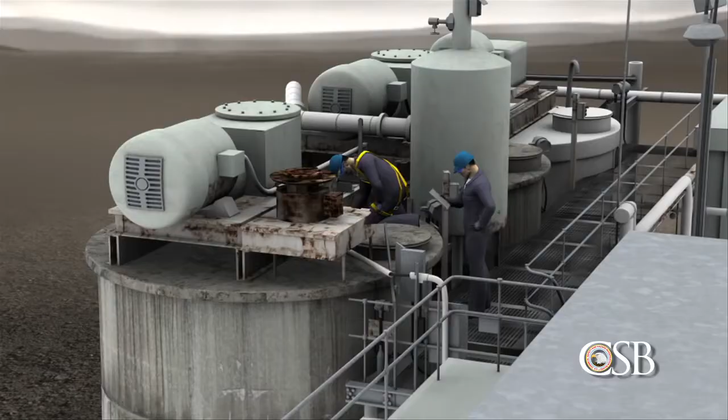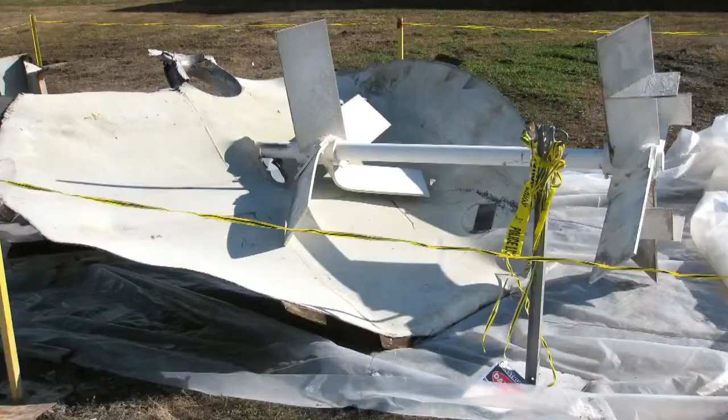On November 9, 2010, a powerful explosion shook the DuPont chemical manufacturing plant in Tonawanda, New York, a suburb of Buffalo. A contract welder was performing maintenance work on a tank that, unknown to him, contained flammable gas. The explosion blew the top off the tank, throwing the welder to the ground and killing him instantly. A second contract worker was burned.

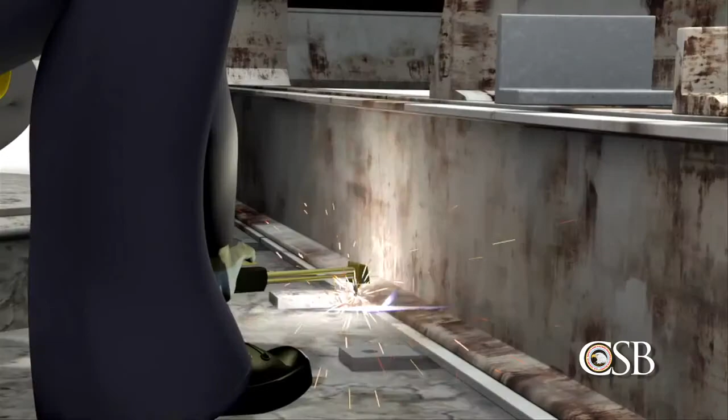The tragic explosion at the DuPont facility exposed weaknesses in how process hazards were analyzed and controlled. The result was the death of a welder in a preventable hot work accident. Hot work accidents occur when workers are welding, cutting, or grinding near flammable vapor, and were the focus of a 2010 CSB Safety Bulletin. Deficiencies in the safety management of hot work were among the causes of the tragedy at DuPont.

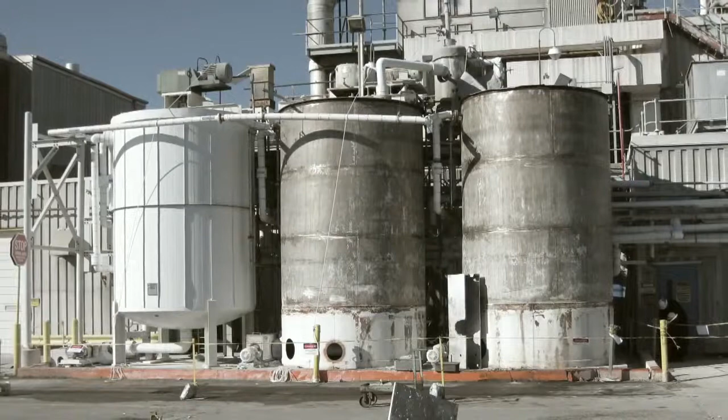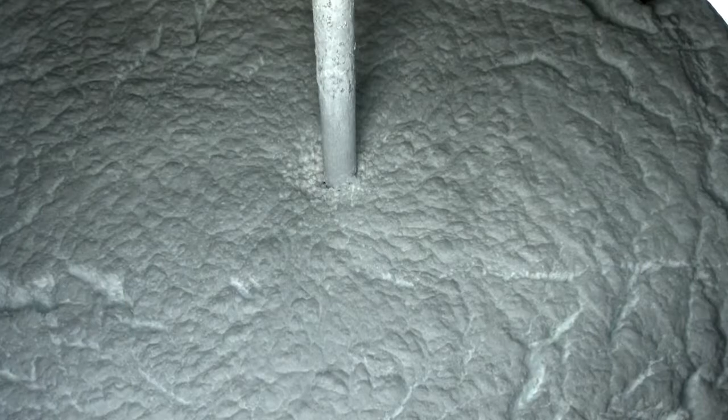DuPont's Tonawanda facility manufactures a polymer known as Tedlar, used in solar panels, and Corian for use in countertops. The process of producing Tedlar began with a chemical reaction to convert flammable vinyl fluoride gas into a slurry of polyvinyl fluoride polymer, or PVF, in water. The PVF slurry then passed through separators.

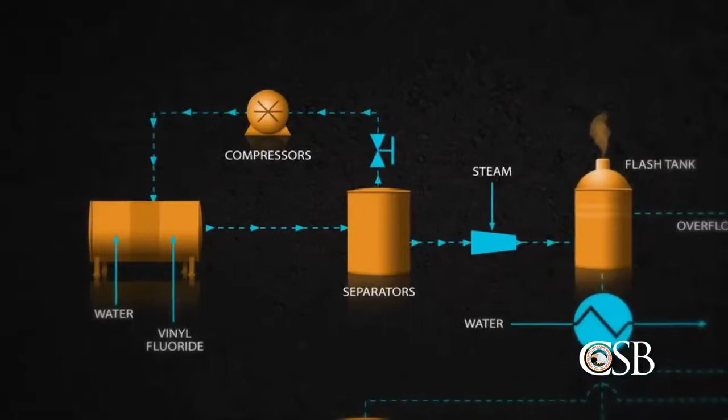Compressors recycled unreacted vinyl fluoride gas into the process, while a small flash tank released residual vinyl fluoride into the atmosphere. Finally, the slurry was transferred to one of 3 insulated holding tanks, usually tank number 3. Tanks 1 and 2 were reserved for slurry overflow. Tank 1 normally remained empty.

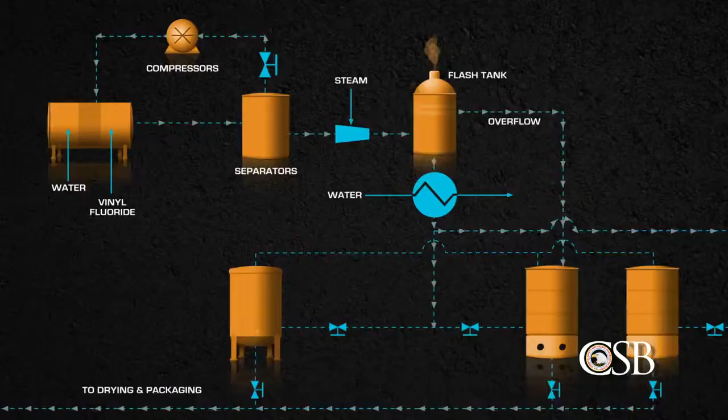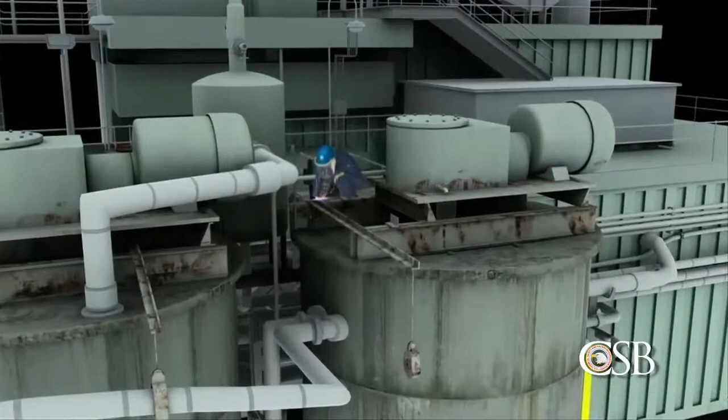On October 22, 2010, the Tedlar process underwent a planned shutdown, during which workers removed the asbestos insulation on tanks 1 and 2. Removing the insulation revealed that the agitator supports for the tanks were heavily corroded. DuPont directed contractors to repair the supports, which would involve welding and grinding on tanks 1 and 2.

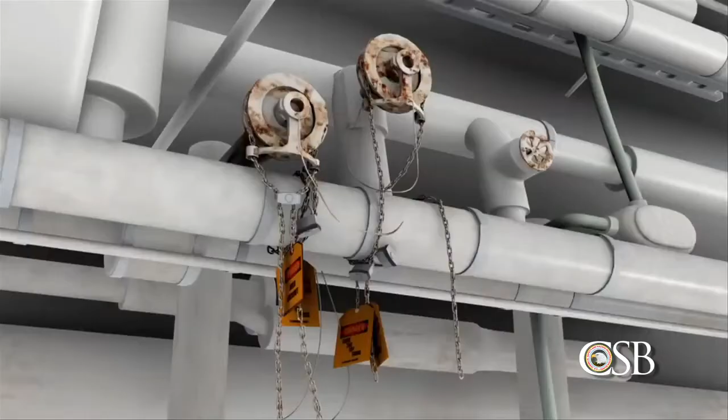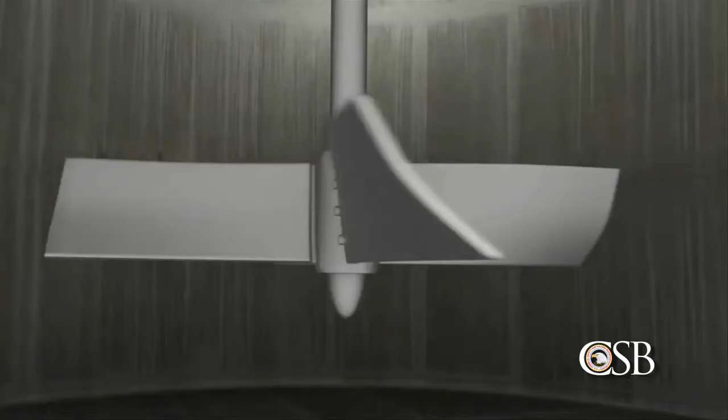The hot work on tank 2 occurred during the shutdown without incident, but the repairs on tank 1 were delayed while parts were ordered. DuPont personnel determined that it would be safe to perform hot work on tank 1 after the restart. On November 6th, DuPont operators locked all 5 valves leading to and from tank 1 in the closed position in order to stop potential slurry flow. The tank's agitator motor was also locked out.

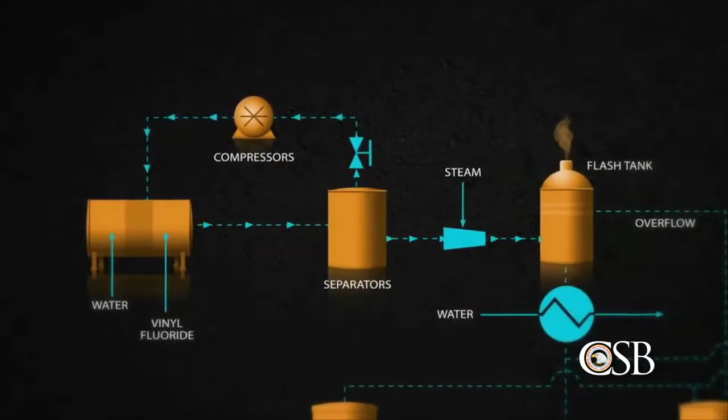However, DuPont personnel did not block the flow of gas inside the overhead piping, or overflow line, that connected the vapor space of all 3 tanks. They mistakenly believed that flammable vinyl fluoride gas could not reach any of the slurry tanks. But the CSB investigation found that even in normal operations, vinyl fluoride was not completely removed from the slurry and was always present in the slurry tanks in varying amounts. When the process restarted on November 7th, the flammable gas was able to travel from tanks 2 and 3 through the open overflow line into tank 1.

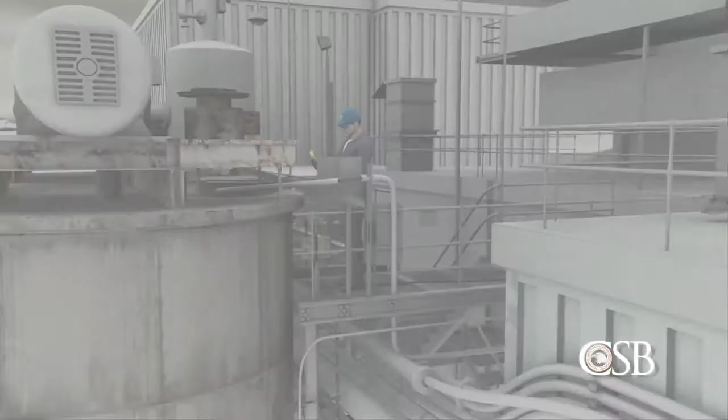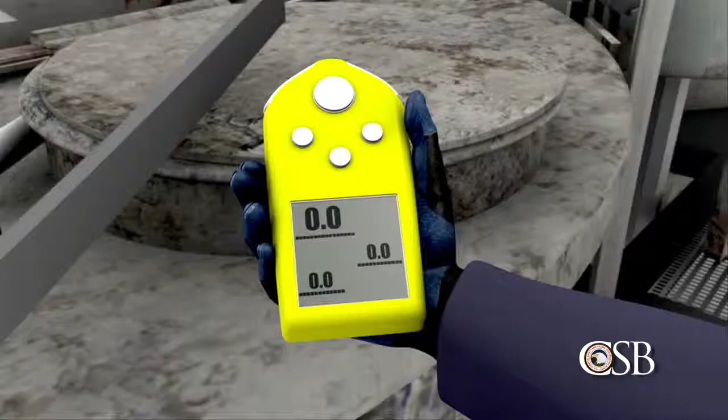On the morning of November 9th, a DuPont technician tested the atmosphere above tank 1, where welding would later take place. There were also 2 continuous air monitors in the vicinity. No flammable gas was detected, and the hot work was cleared to begin. But no testing was done to measure or monitor the atmosphere inside the tanks, where, unknown to the contractors, the flammable gas was at dangerous levels.

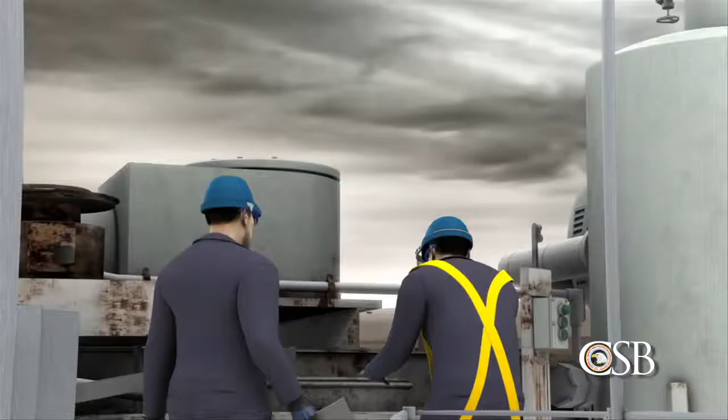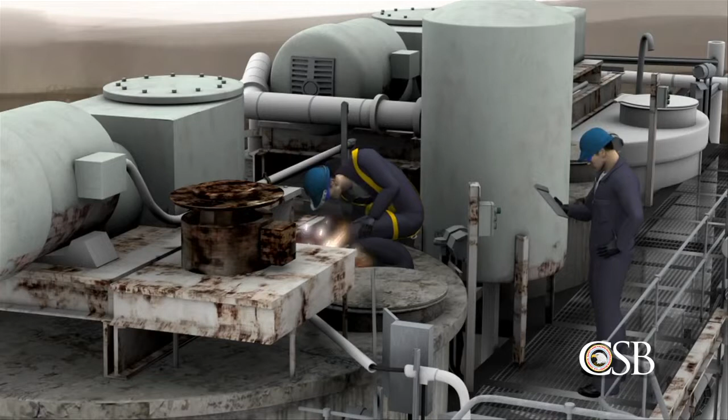Around 9 a.m., 2 contract workers began welding and grinding on tank 1. The welder connected his safety harness to the tank's agitator support and worked on top of the tank as the foreman looked on from the nearby catwalk. At approximately 11 a.m., the welder was repairing corroded portions of the agitator support beams directly above the flammable gas. A hole around the agitator shaft may have provided a pathway for ignition. Welding sparks could fall into the tank, even as flammable gas might drift upward toward the sparks. The ignition of the vinyl fluoride caused a powerful explosion.

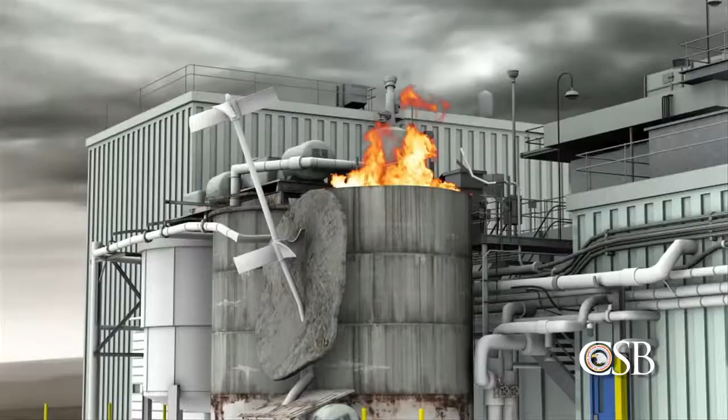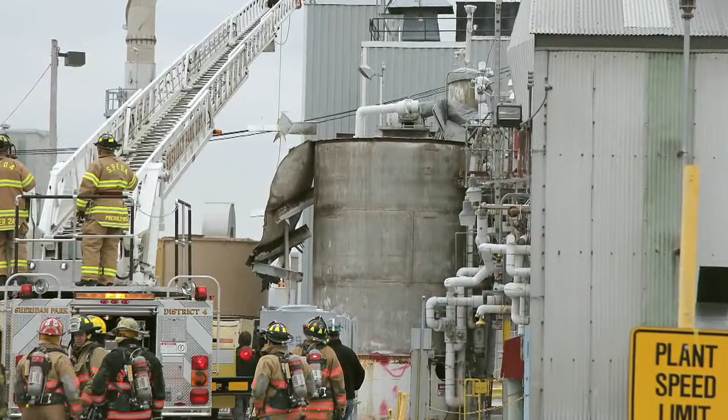The force of the blast blew the top of the tank almost completely off. A flash fire erupted that consumed the flammable gas and quickly burned out. The welder was thrown to the ground, killed instantly from blunt force trauma. The foreman's face and arms were burned.

Mark Wingard was a member of the CSB team that investigated the accident at DuPont. Had DuPont technicians tested Tank 1 for a flammable atmosphere, they would have known that any hot work presented a serious explosion hazard. But plant engineers did not realize that significant amounts of flammable gas could be present in the slurry tanks, and the testing was never done.

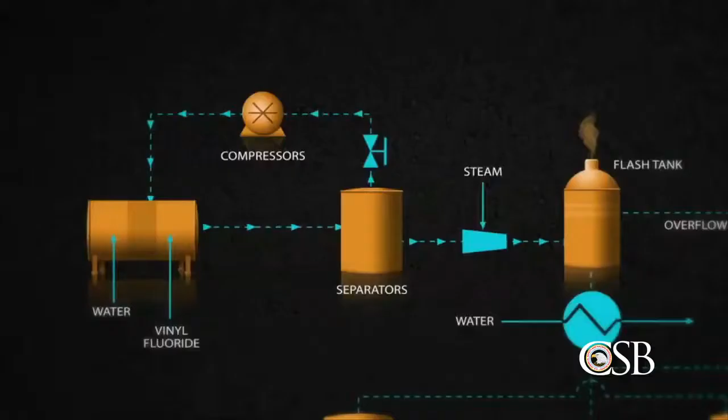DuPont regarded most of the Tedlar production process as covered under the OSHA standard for Process Safety Management, or PSM, and therefore subject to stricter operating and maintenance requirements. But DuPont personnel did not include the slurry tanks in the facility's PSM program. In a 2009 process hazard analysis, DuPont erroneously concluded that flammable vinyl fluoride gas could never reach the tanks in dangerous quantities.

We found that the contractors did obtain hot work permits for welding on Tank 1, but those permits were authorized by DuPont employees who were unfamiliar with the specific hazards of the process, and the permits did not require testing the atmosphere inside the tanks.

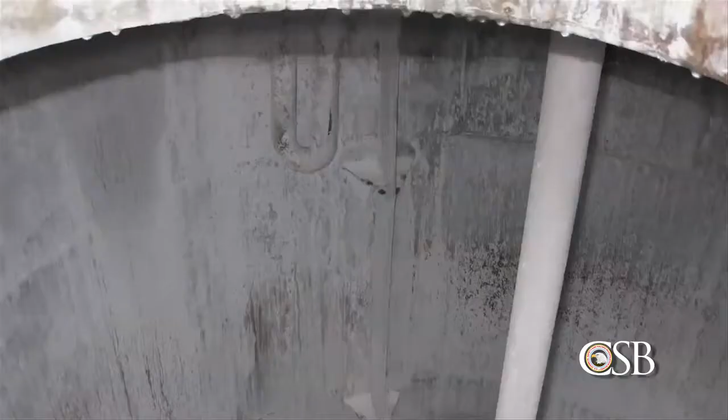Two additional factors may have contributed to the tragedy. Prior to the explosion, DuPont personnel had discovered that slurry tank number 2 had a hole in a liquid trap, which was designed to prevent the flow of gas from the flash tank. Without a liquid seal in the trap, there was an additional pathway for vinyl fluoride gas to flow into the tanks. However, this hazard went unrecognized, and DuPont engineers concluded that it would be safe to return the tank to service. No formal management of change review was conducted.

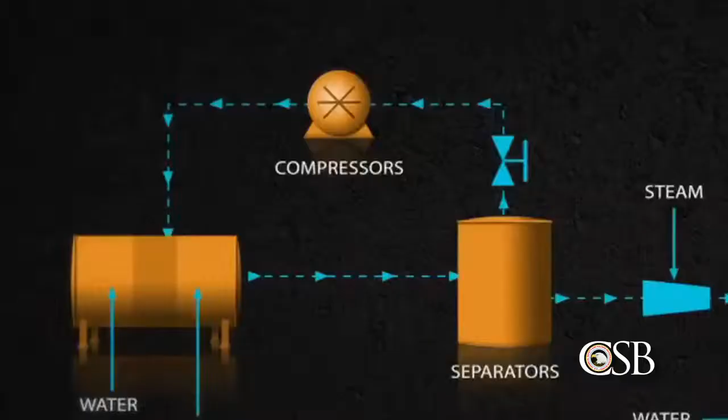Further adding to the danger, on November 8th, there was a malfunction in a compressor used to strip vinyl fluoride gas from the PVF slurry. As a result, the slurry contained more than the normal amount of vinyl fluoride. Once again, DuPont personnel did not formally analyze the safety impact of continuing to operate with a malfunctioning compressor.

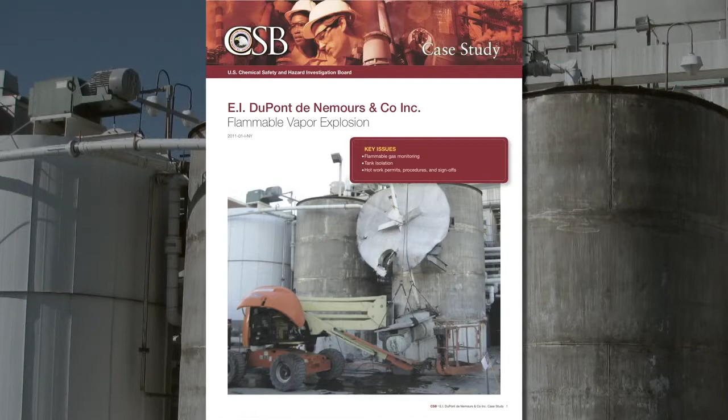In its final report, the CSB recommended that DuPont revise its corporate policies to require atmospheric monitoring inside tanks before and during any hot work. And the board recommended that DuPont require all process piping, including vent lines on tanks, to be positively isolated before authorizing any hot work.

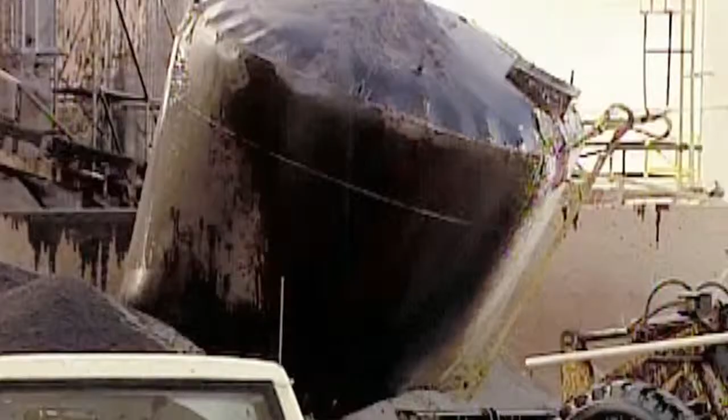In our 2010 Hot Work Bulletin, the CSB identified 11 accidents similar to the one at DuPont. All involved hot work on tanks that ignited flammable gas inside. In all cases, the CSB found that there was not an adequate system in place for monitoring the atmosphere for flammable vapor where hot work was to occur.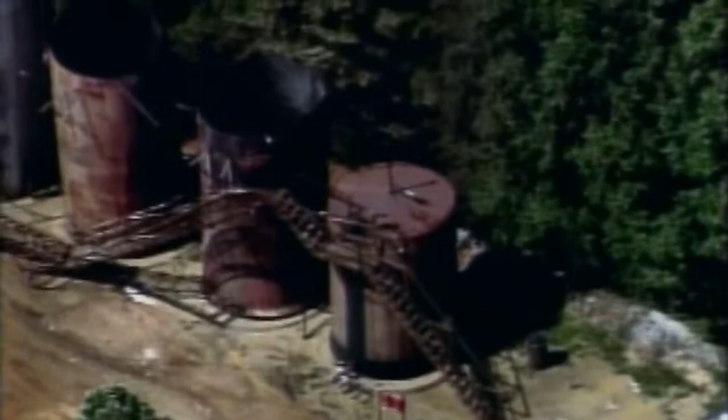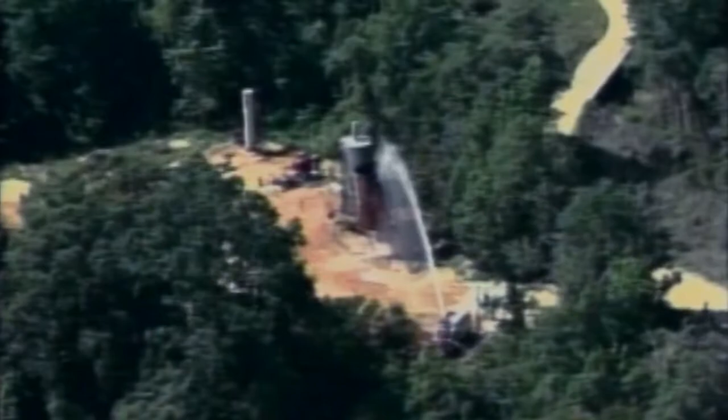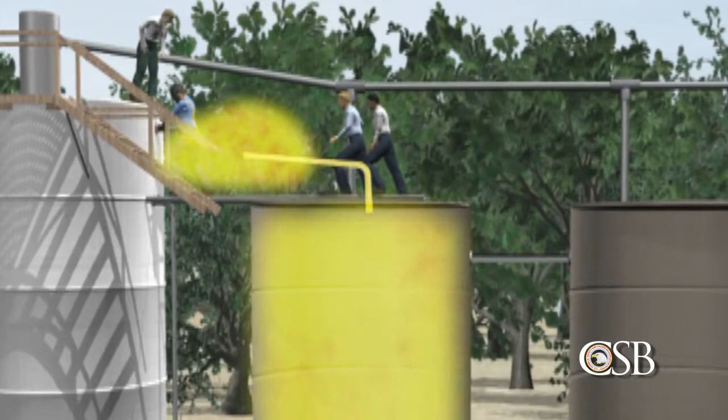For example, in June 2006, 3 contractors were killed and another seriously injured in an explosion at the Partridge-Raleigh oil field in Raleigh, Mississippi. The contractors were welding on one of 4 storage tanks when welding sparks ignited flammable vapor flowing from an adjacent tank. As was the case at DuPont, no monitoring was performed to test for flammable gas inside the tank, and piping to the adjacent tank was not isolated.

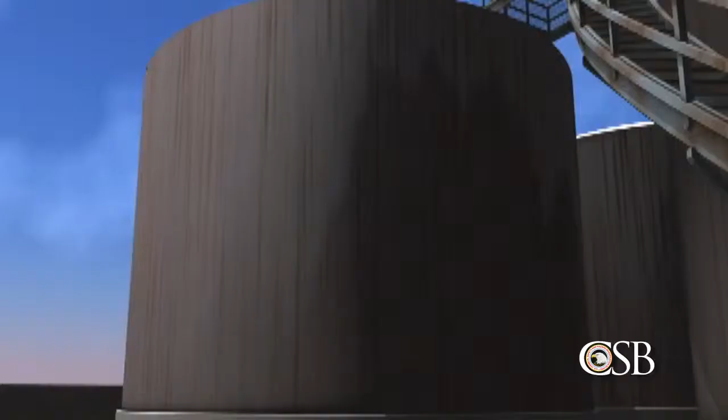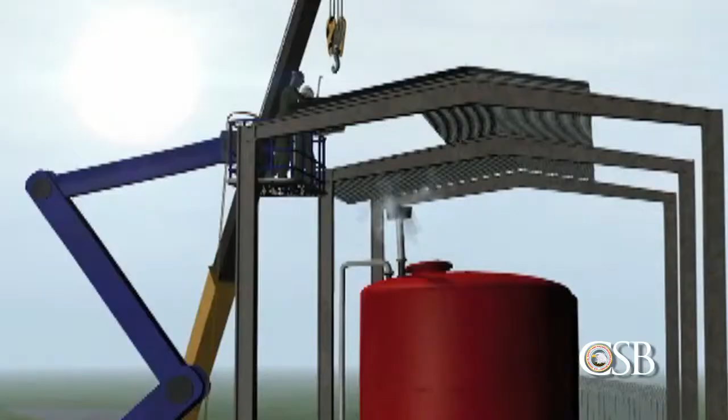In July 2001, an explosion killed 1 contract worker and injured 8 others when welding sparks ignited flammable hydrocarbon vapors in a large sulfuric acid storage tank at Motiva's Delaware City refinery. And in January 2006, 2 workers died and another was seriously injured in an explosion at a municipal wastewater plant in Florida when hot work ignited vapor inside a storage tank of highly flammable methanol. In all of these cases, combustible gas monitoring either was inadequate or wasn't performed at all.

In its 2010 safety bulletin, the CSB said companies can prevent hot work accidents by analyzing the hazards, enforcing rigorous training and permitting procedures, constantly monitoring the atmosphere for flammables, and avoiding hot work in favor of non-spark producing methods whenever possible. Hot work is often seen as a routine activity, but it can prove deadly if fire and explosion hazards are overlooked.